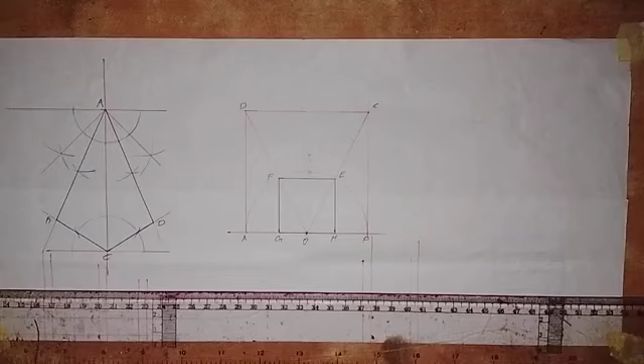Let's say the side length of the triangle is 80 millimeters, an equilateral triangle. We are using an equilateral triangle of length 80 millimeters. Let's see how we can construct this triangle before we go on and inscribe a square in it.

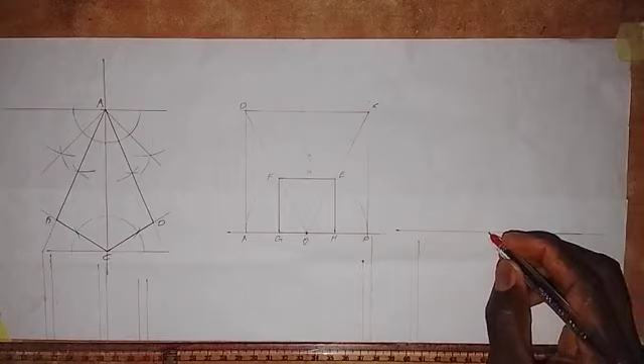First we are going to draw a horizontal line of any length. Then we are going to mark a point here. Let's call this point D.

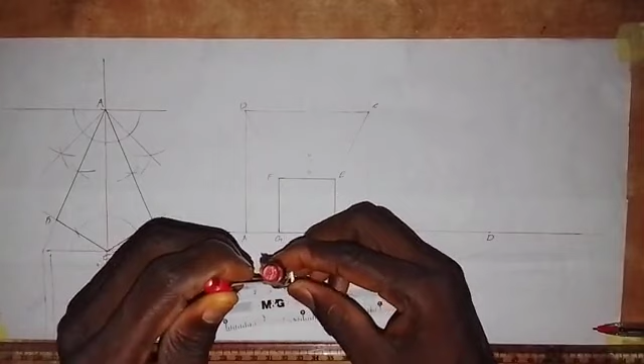We are going to take a measurement of 40 millimeters, half the length of the triangle. I mark 40 millimeters from point D to this side, and I'll also mark 40 millimeters to this side.

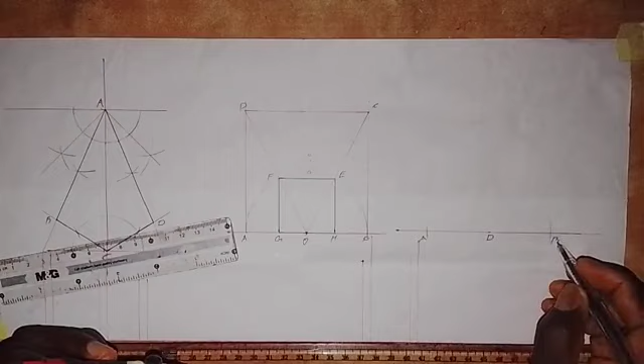I'm going to call this line AB. This is point A, and this is point B. So AB is 80 millimeters, the length of the triangle that we are inscribing a square in.

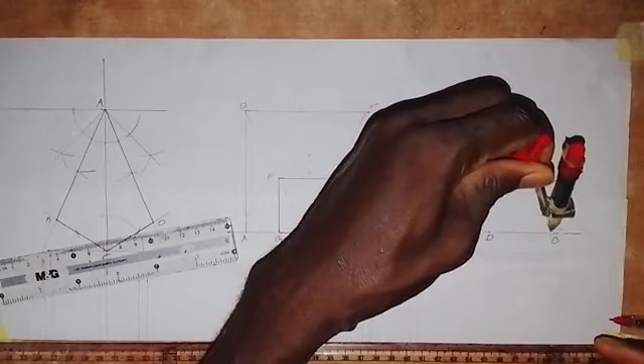With the pinpoint of the compass at point A, I extend the pen point to point B, since AB is 80 millimeters, the length of the given triangle, and draw an arc like this. Then bringing the pinpoint to point B, with the pen at point A, I also draw an arc like this.

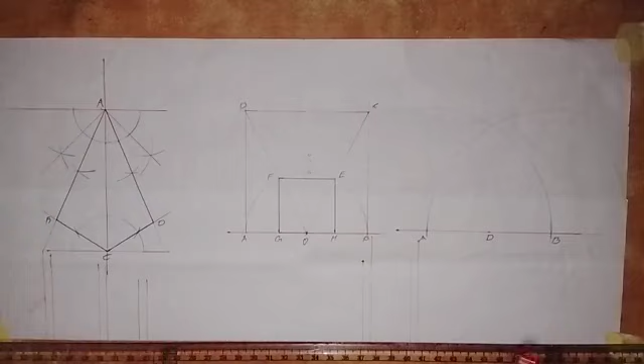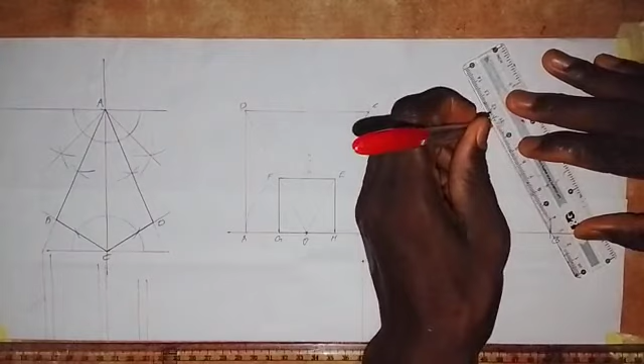Now we can construct the given triangle. I just need to join the points. This point here I'll call point C. I'm going to connect these two points together: point AC connected with a straight line, and point BC also connected with a straight line.

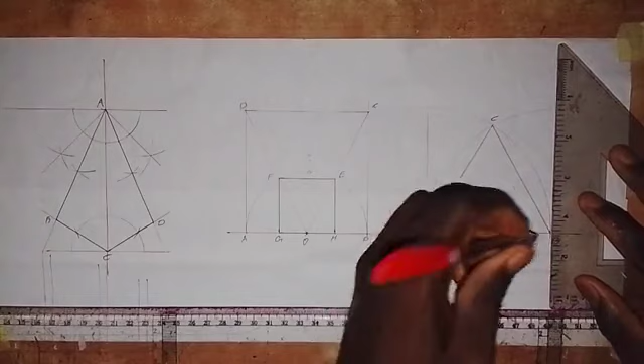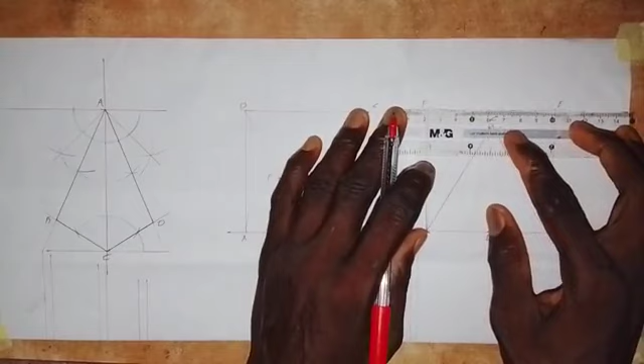The next thing is to turn this into a square by drawing a vertical line from point A to touch the arc at a point, and then from point B to touch the arc at another point. This point I'll call point E, and this point is point F. I'll join EF together with a straight line to form a square, giving us square ABEF.

Now we are going to draw a vertical line, joining these two points together to form a vertical line here.

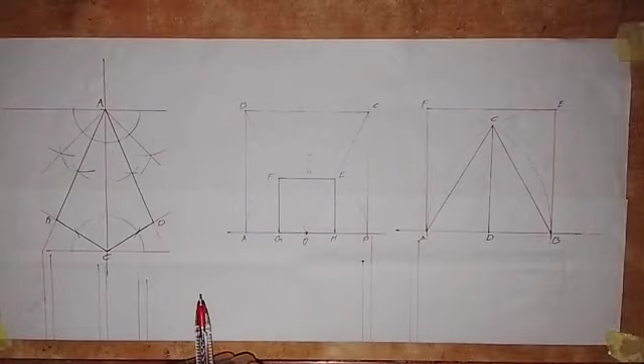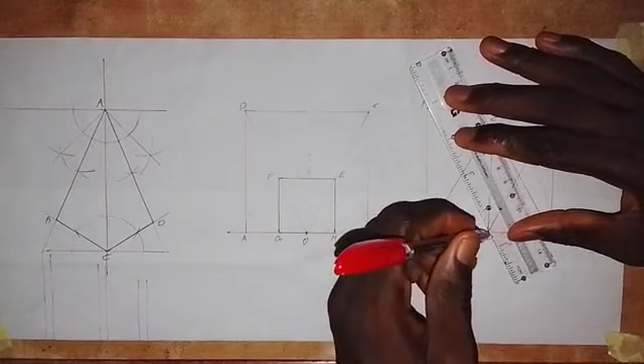The next thing is to connect these two points, DE, together with a straight line, and connect DF together with a straight line. So connecting DE it goes like this, and then we connect DF together with a straight line.

This line DE touches the triangle at this point, which I'll call point G. And line DF touches the triangle at this point, which I'll call point H.

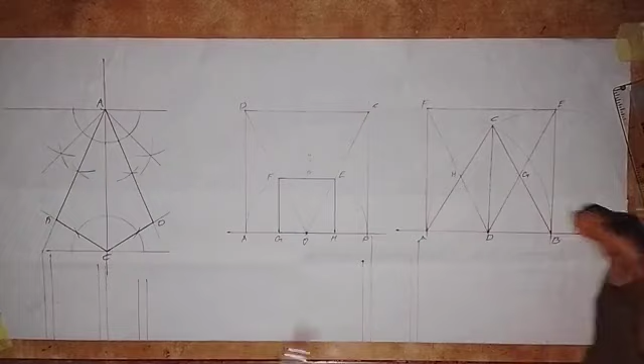Now we are going to connect these two points together. GH, connect them with a straight line, and GH is a side of the required square.

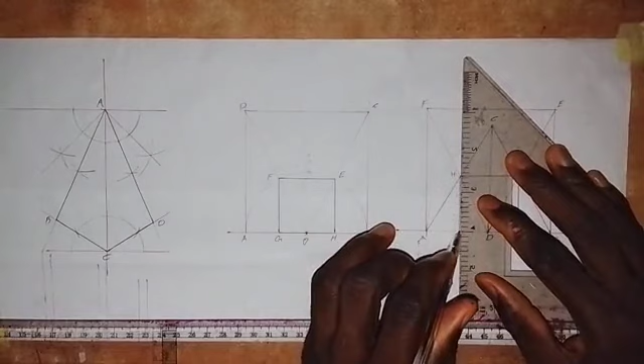To complete the square, from point G we draw a vertical line touching AB at this point, and also draw a vertical line from H touching AB at this point. We make this line a thick line, giving us the required square. This point is point I, and this point is point J. So here we have square GHIJ, the required square inscribed in triangle ABC.

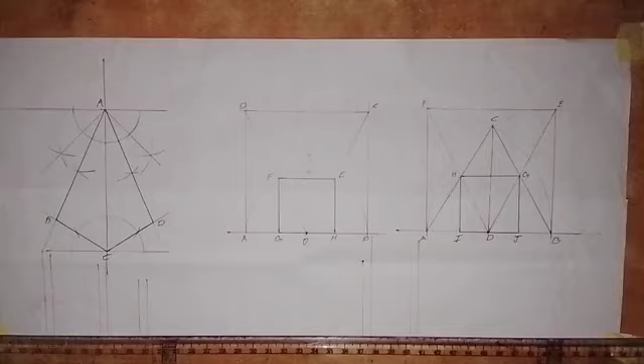It's as simple as I've done it here. All you have to do is practice, and you become a master at this work. Thank you, keep on practicing, and God bless you.